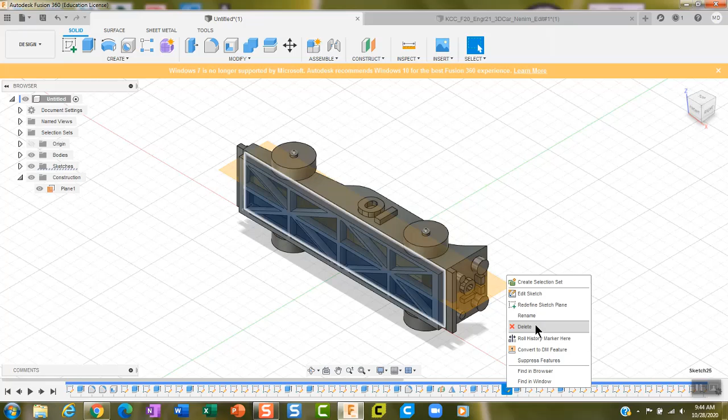Okay, so we have to go back to right here, and we need to erase all of this stuff. We need to erase up to here probably. So I would grab from here and delete. Okay, and then I'm going to delete right here.

And there you go. Okay, looks like you still have the drawings of the triangles that have to be deleted. So everything probably after that has to be deleted. So let's see if we can shift everything, hold everything, and just delete everything at once. Let's take a look.

Okay, so I highlighted everything using the shift button. Let's see if I can delete everything at once. Yes, okay, so we can delete by just holding the shift button down and getting rid of everything. Okay, and then I'm right-clicking and deleting.

Okay, Nanim, so I erased everything in the tree all the way up to your last extrusion of your initials right here. So erase everything after that by just highlighting it and right-clicking and delete. Okay, so let's get back to right here. As you can see, your initials keep popping up when I hover over this extrusion.

Then we're just going to simply go to Construct, and we're going to left-click and release. Offset plane, left-click and release.

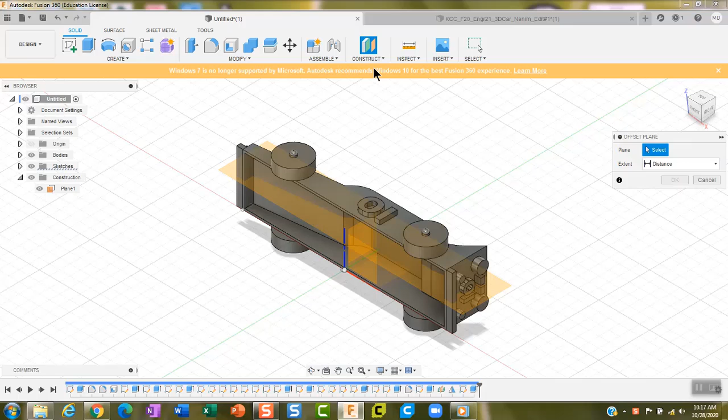And then we're going to come down here, and we're going to use the scroll wheel to make the car body a lot bigger, because we're going to choose this bottom of the car as the plane. We're not going to choose this little plane right here, because there will not be enough area in which to draw. So we'll choose this right here, although this plane is the same as this plane. It's just that if we pick this plane instead, we'll be able to see the plane much larger.

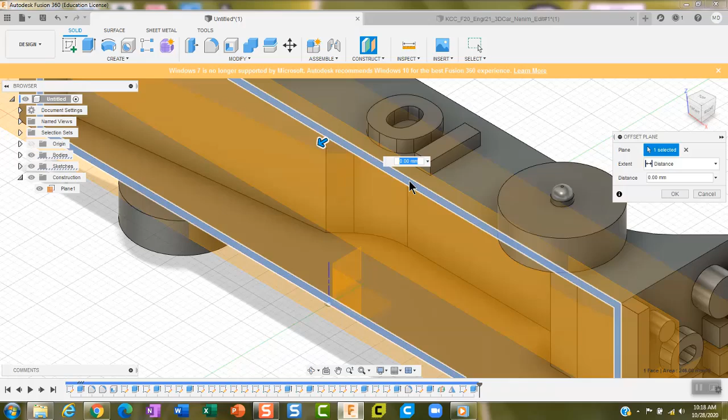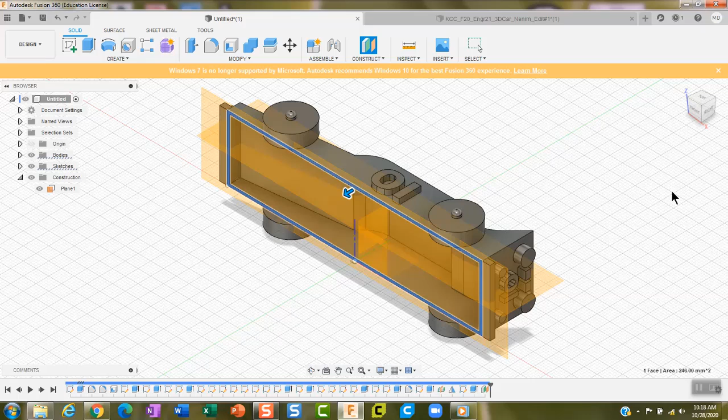Watch, I'm going to left-click and release. You're going to see the plane pop up. And there it is. I'm going to use the scroll wheel so you can see the plane that just popped up, and there it is. And I can move the plane wherever I want. Obviously, let's just keep it at 0 for now. And there we go. 0 and OK. Okay, we now have a plane on which to draw.

So all we have to do now is draw our chassis on the plane, extrude it, draw the triangles on the plane, reverse extrude the triangles, and then we can move the plane in and out of the car body afterwards. In fact, I'll show you.

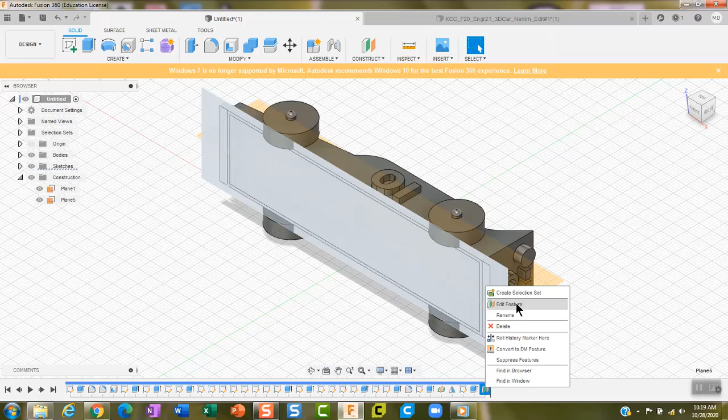We can right-click and select, right-click and release, edit feature, and I can move the plane wherever I like. There it is. Okay, again, let's just cancel and get it back to 0.

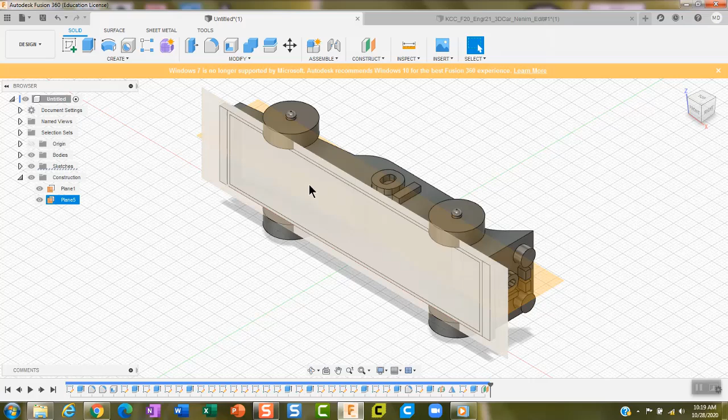So let's draw the initial chassis without the triangles. The 2D part of the chassis without the triangles on this plane. Well, it's very easy. Just left-click and release on Create Sketch.

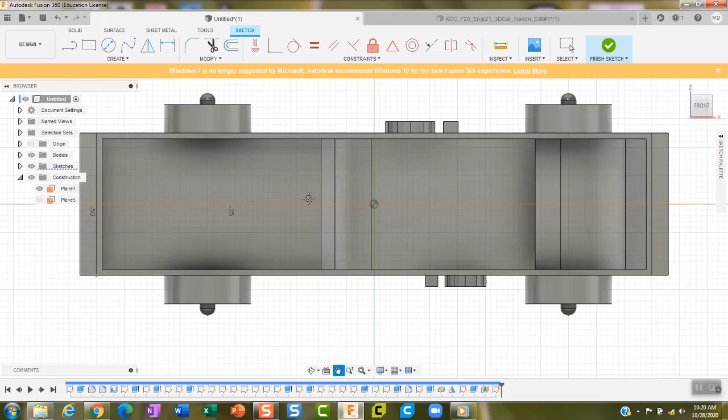Left-click and release on the plane. Let's grab it with the hand and center it. There we go. Let's use the scroll wheel and make it nice and big so we can see what we're drawing. Let's move it over a little more. There we go, nice and large. I want to be able to see this whole area here. So I'm going to draw the 2D drawing of the chassis right inside this car body here.

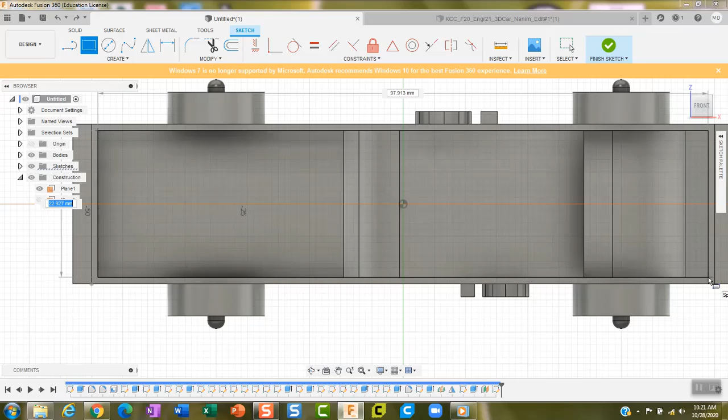All right, I'm in the hand tool, so I'm just going to hit the escape button. And now we just go to two-point rectangle, left click and release, and there we are. There's crosshairs, put them right where you want them. Left click and release, drag it out, put it right here where we want it. There we go. Left click and release, and there you go. You now have the 2D drawing on the plane that's flush to the bottom of the car body.

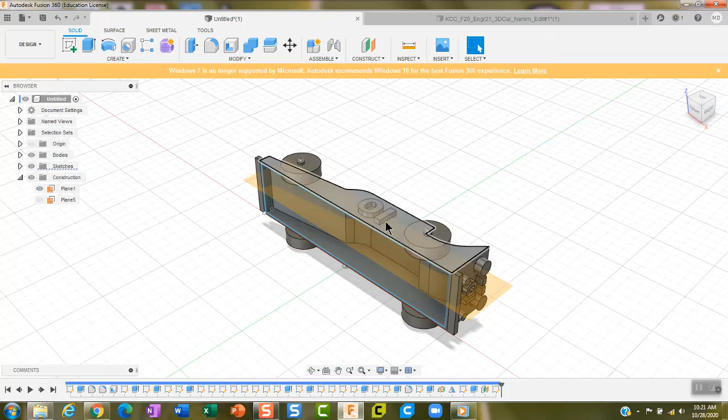And let's just finish the sketch. And let's go to the home button. And there we go. Okay, now all we have to do is hover over that 2D sketch we just made. Left click and release. Notice it turns dark blue so we can extrude it. Left click and release extrude.

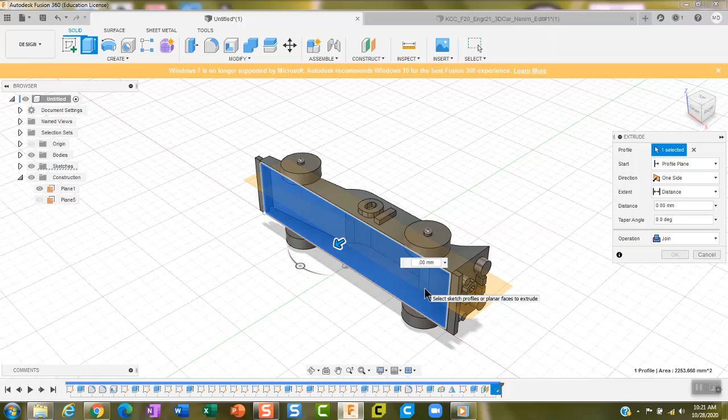We get our normal arrow. Pull it out 3. If it doesn't come out easily, just click inside the text box and entry box. And let's see, we don't want join, right? We want new body. And let's click OK.

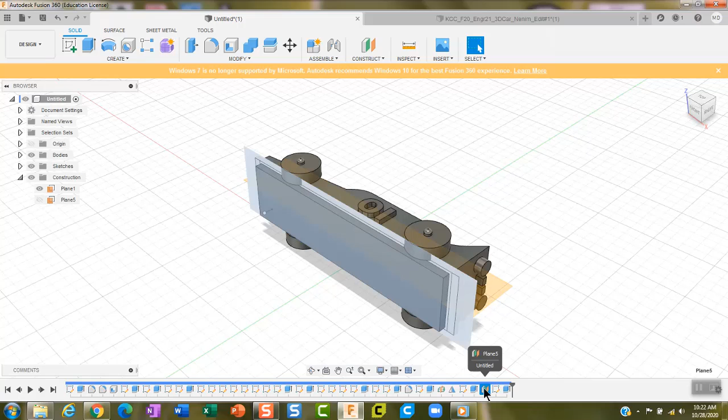Okay, now all you have to do is draw your triangles, which I'm not going to go over because you already know how to draw your triangles. However, I do want to show you that afterwards, if you left click and release, then right click and release, and go to edit feature, you can move the chassis wherever you want. There you go, I just moved it away from the car. Edit feature, and I can move it back into the car if I want.

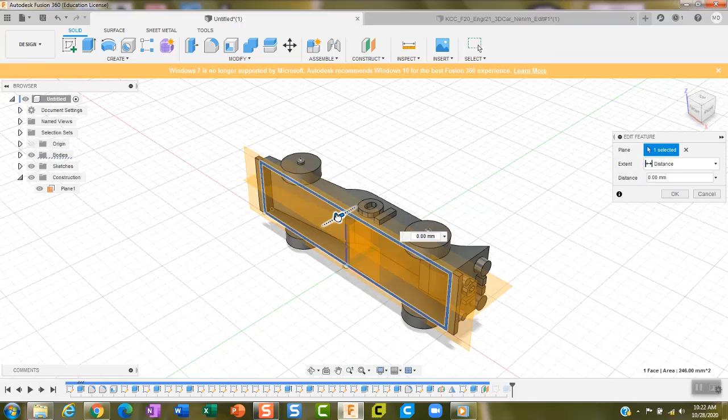Let's see, right about there. Well, that's back at 0. I think we probably want to do a little bit more. 5. No, we want -3. Okay, and there it is.

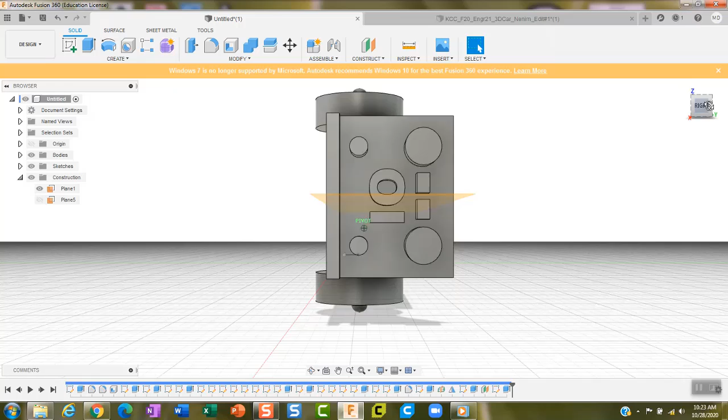It's now inside the body, the chassis. It's flush with the bottom. How do you know? Well, there it is. You can't see it, it's not sticking out. There's a good shot, you can see that it's flush with the body.

All right, so let me go to the home button. Let me bring it back out. All right, like I said, you can move the chassis in and out. So now just redraw your triangles and then move it inside.

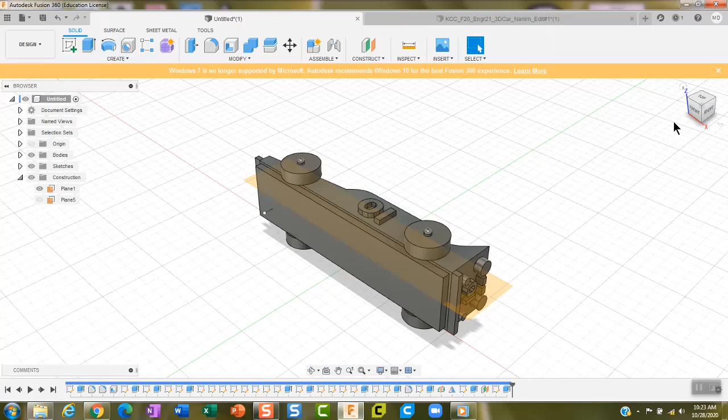And then you forgot you have to do your windshield, which is right here, and you have to do the turbocharger, which is right on top. Okay, just look at the video on YouTube and you'll be able to do that.